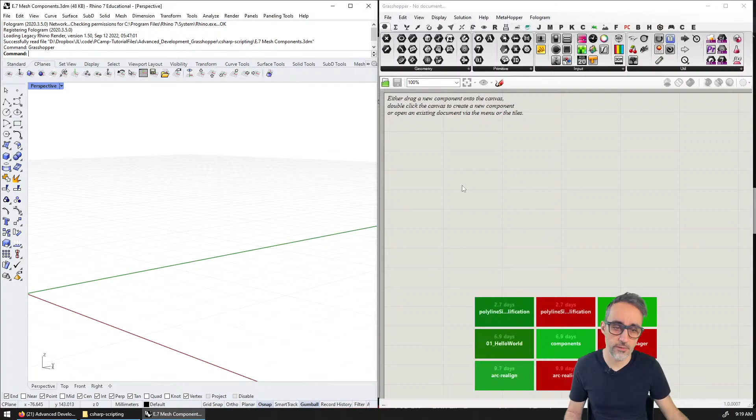Wait, I need to check something out. So we did have document components, mesh components. So why do I not have document components? It feels like it should be there, no? Mesh components. Alright, so mesh components is this one, and we got the geometry and the person class and all that stuff.

Mesh components, dynamics. How is this different from this other file that I have here, which is opening in a different browser? And it's opening here. Because this is the one where I was doing - I see, yeah, what I was dropping, the actual plugin components.

Oh, by the way, I got an email. Remember we published this to Food4Rhino? I got an email from Food4Rhino saying, 'Hey, we just saw that you have no icons in your plugin, can you please take a look at that?' So I guess we need to make some icons for the plugin.

Okay, so I guess then I'm missing some files somewhere. Let me look up this. Where are those files? Alright, so document components.

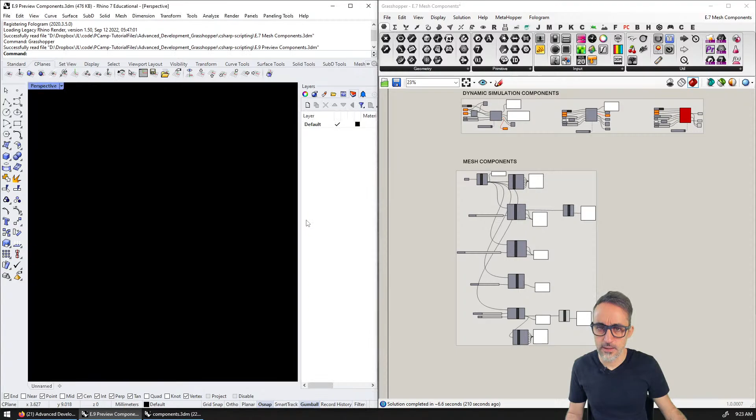Very nice, auto updating simulations. Okay, alright, so I guess I have the files. And then I guess what I need to do is take the latest whatever I had and open them here.

I had mesh components, document components, preview color. Alright, preview - okay, so I guess it's just going to be some work to port all of these to native components, basically. Okay, so that shouldn't be a lot, I think. We never know.

And what I could do is also make a file like this where all the components are displayed. That could be nice too.

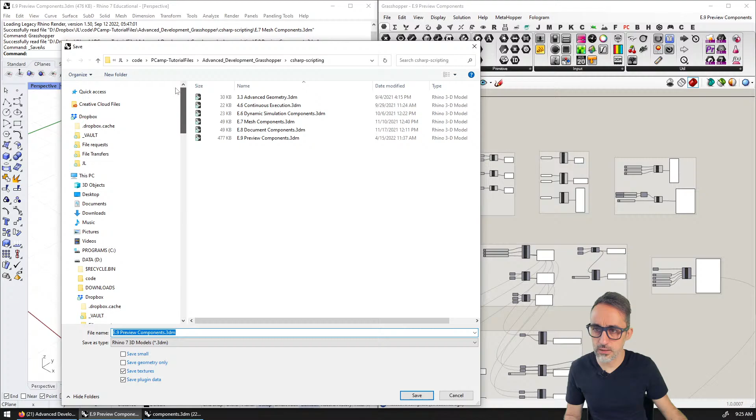Okay, so then what am I going to do? I'm gonna have a file then, I'm going to save a file. And this is going to be - I'm gonna call this parametric camp plugin or something like that. So I'm gonna go to the desktop and make a folder called pcamp plugin, and then I'm gonna call this pcamp components, for example. So that's gonna be it.

And then here on the components, data, utilities, add numbers, console logger, string concatenation.

I need to open the Visual Studio project. Where is it? Where I did the PCamp Grasshopper plugin. I'm going to use 2022 for this one because the typeface is a little nicer.

Okay, so utility components, add numbers - this we probably don't need. Do I need this? Well, I'm just going to do it, and that's going to be nice.

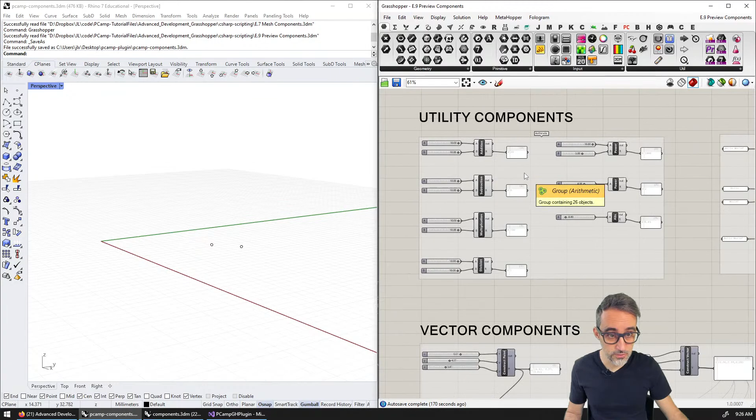I'm going to take this and turn it into, basically clone and copy the components to the side. Why not? I could save this, save document as - go to the desktop, PCamp plugin here, and do PCamp components as a Grasshopper file. What I can do is build them next to one another, no? I guess I could do that.

Before we do that, let me make an icon for this. Icons need to be 24 by 24, so I'm going to make something here. What did I have for icons before?

GitHub, Advanced Development, Grasshopper Plugin, Resources. We had this one, which was arguably a little boring - Parametric Camp. And we had this one. Nope, I don't want that there.

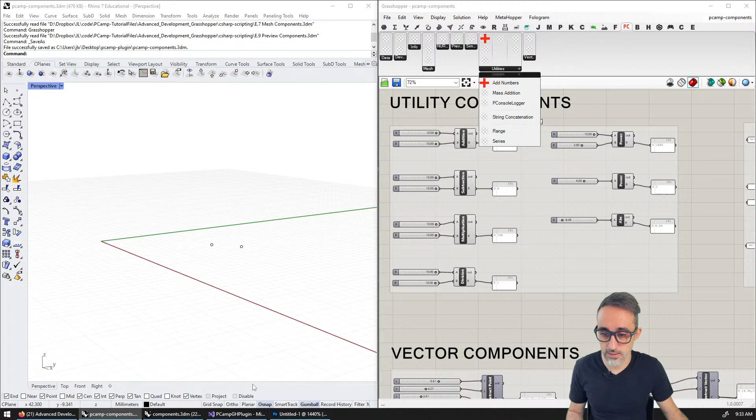Okay, and then we have addition. So let's start with the basics. I'm going to take add numbers - oops, I'm going to take add two numbers, which I already have. And then where did I do icons? I have icons already in utilities, add numbers. Actually, oh, I already have this.

So where is the icon here? I may not have registered it. Okay, well I do have it, yes. So, plus sign - oh no, so I have to add it to resources. What are my resources? I'm systematically confused - where did I have my resources?

Oh wow, this is very green. Okay, dependent and properties, resources - I need to include this. No, I need to include this. Invert parametric camp. All right, I'm gonna say - nope, no, where did you go? I'm gonna save this. And then here I should have now PC invert.

Now what I would like to do is save these files to the repo. I'm gonna save these files to the repo, and I'm just gonna create here a sample files folder.

I'm going to move these files and change this to start in that file. Where are those files I was working with, auto updating? I don't know, so for the PCamp plugin, I'm going to take these files and put them here. That's going to be my new setup, and then I'm going to modify the project so it starts with those files. Where's the project? It's here in the solution. So I'm going to take that solution and change the executable to look for this entire Grasshopper plugin thing, and then where are the sample files?

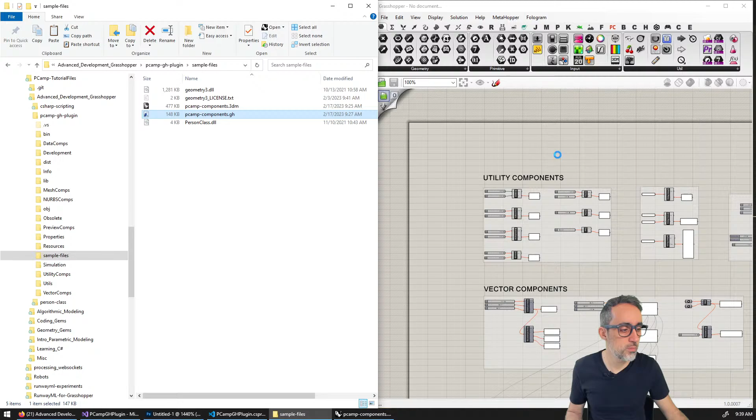Something is not properly linked. Why did I do this? What is this? Am I using Script Parasite in that file? Is that what's going on? Let me just open this straight up. Was I opening it? Maybe that's what was going on. Was I using Script Parasite anywhere? And that's the problem I'm running into.

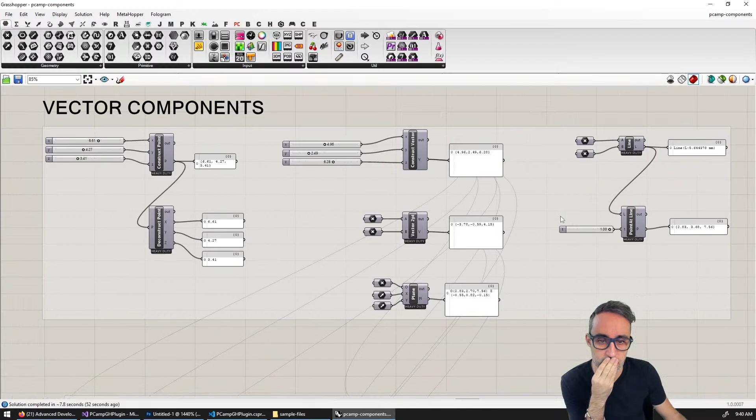Oh boy. Why? Why can things not be easier sometimes? Ugh, okay. Heavy duty, heavy duty. Also this should probably not be heavy duty, right? Data components, document components, preview color, heavy calculations, get heavy objects, add message, preview components. I don't think there's any Script Parasite here. I wonder why that's not working.

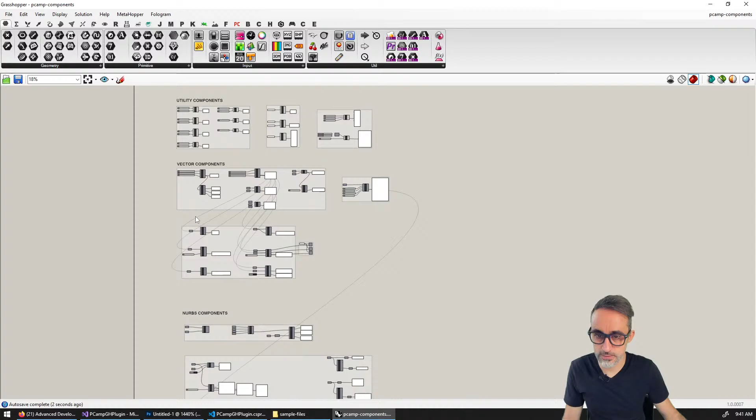All right, so we're going to do like we typically do, shut down everything. I'm going to copy pcamp components here. Okay, and then we're going to do itemized debugging, which means I'll open components one and delete half the stuff. I'm going to see if this was the problem. So I'm going to close this, and close this as well, and then just try to run this from here.

Okay, and components. It's opening on my other screen right now. Why is my computer kind of crazy today? And it opened up fine. Was it because I opened the Rhino file? Let me try that. I'm going to open this without opening the Rhino file and see if it was some kind of clash or problem with unreferenced files in Rhino.

Nope, okay, so that's good. So we cleared half of the thing. So then let's open components 2 up, and this one fails as we open it. So there's something that is messing with the code. Find source. Okay, so we found something.

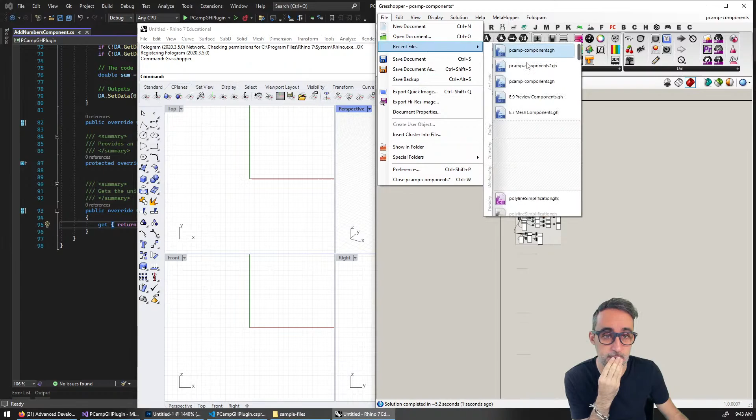So I'm going to open Rhino without any stuff, and open Grasshopper. Yeah, today's going to be kind of a boring stream. Okay, pcamp components 2, and this opens up nicely. So we had the issue in the first one.

So I'm going to introduce now this block here, add it there: dynamic simulation and mesh components. See if this works. Okay, let's save this. I'm going to close everything and try to open from here, and then let's see if it opens up. Nope. So we found the error.

Okay, so something there is not working. So now let's remove another chunk. Detective work here. Let's find what chunk: mesh components. So maybe it's a problem with loading the libraries. Mesh components. I'm going to save this. We're going to try to run from here.

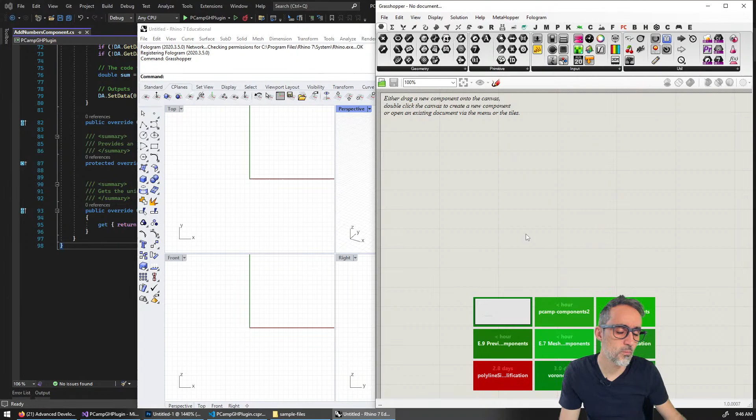Let's see. These ones, is it these ones really? Object reference not set to an instance of an object. Yeah, I know. Because we don't have anything here.

Object, and here index was out of range because we don't have the... Is this the problem, really? I'm going to save this.

I'm going to close, restart over. And then I'm going to open the file and it's going to open properly. Yep.

Okay, let's introduce one of the components and let's see if that was the problem. Okay.

Grasshopper. Let's introduce one of them. I'm going to take... And now it's blocked. Ah, oh boy, this is bad. Come on, come on. And then...

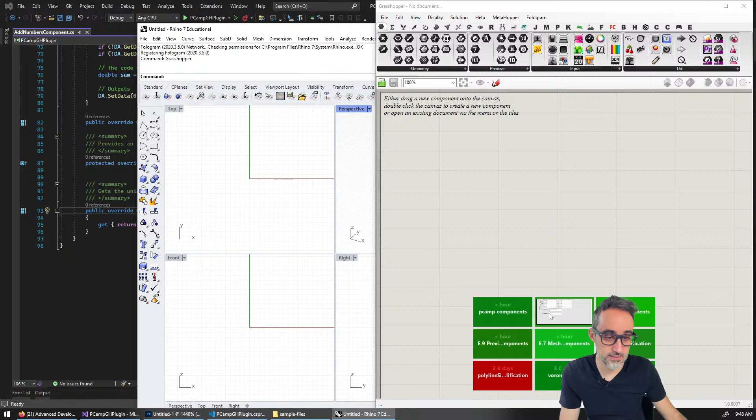All right, so I'm going to open my file. I'm going to open the one with all the files, and I'm going to go to here. I'm going to take dynamic simulation, paste it here, and remove all these folks here.

Okay, I'm going to save this and see if that one is the culprit of all this mess, and if that's the problem that we're hitting.

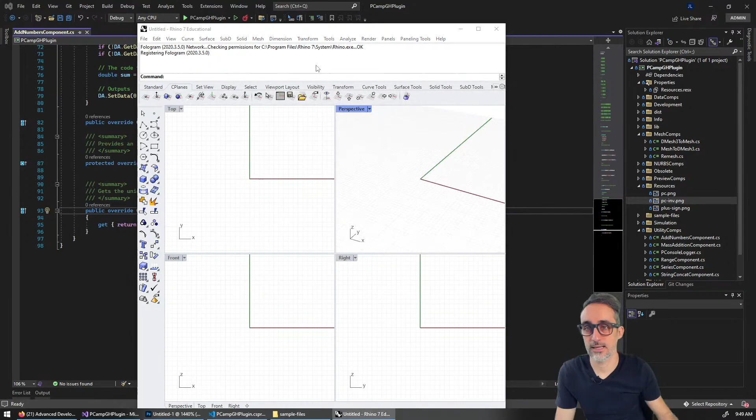Huh, okay. So there is a problem there in that. Okay, so we identified the component that is giving us a hard time here. Okay, so let's take a look at what's going on there.

Grasshopper. This guy. So this guy, it's giving us an exception. Object reference not set to an instance of an object, which is the error that we were getting in Visual Studio.

I wonder if what's happening is that because this component is throwing an error that is handled by Grasshopper, when we open with Visual Studio it picks up this error before Grasshopper does, and then it gives us a fail. So what is it that it's not reference to an instance of an object?

I guess it's the points. Is that correct? Because everything else, if reset is true, so if I do this, that's fine.

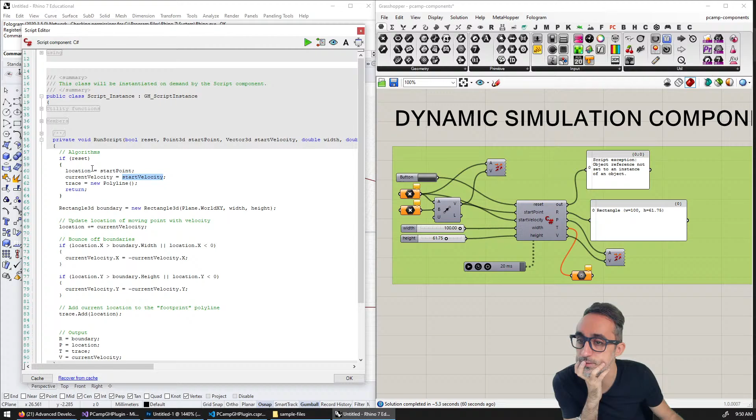Boundary block if location.x, location is the start point, current velocity is start velocity. If this is null, can it be null? Okay.

Checks. If start point equals null, then print no data, and then return, but it can't be null because it's a struct, so it cannot be...

Is... Okay, so let's all right, so let's, maybe this is some sloppy coding. Okay, so still we do have...

Unset polyline is trace. Okay, so this is not working. Not working. Not working. What the hell? Nothing is working here. Okay, so...

Location and velocity and trace. This must be. How are these? They are trace exists. This exists. They are unset points. Location exists. Current velocity exists. All right.

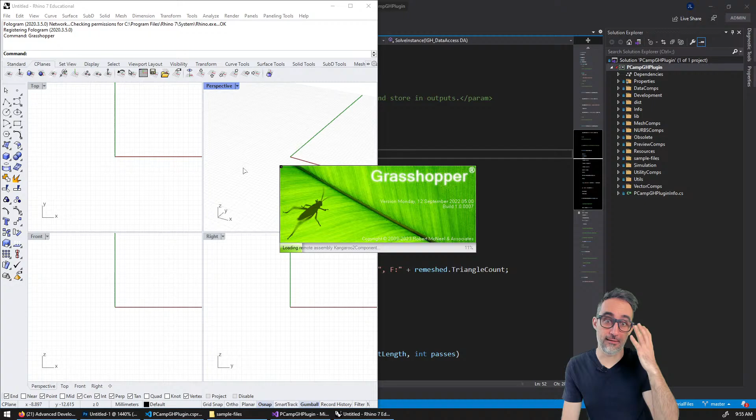The life of debugging. I want to ignore this. Okay.

So let's try to figure out why a new polyline is giving me this. Okay, so I'm going to uncomment this. It's going to give me this error, because trace is not there.

What if, okay, so A, and what if I create a new empty, and then say this is going to be just a new polyline with nothing in it? Do I get an error?

Okay, let me comment this out. Do I still get an error? I do get an error. And A equals, so I'm going to comment this out.

So new polylines, for some reason, they yield... is there not a... Okay, so let's see, let's look at the constructor. Can I create a new polyline with no arguments?

Initialize a new empty polyline. Initial capacity, collection, so I can create an empty polyline. Why can I not?

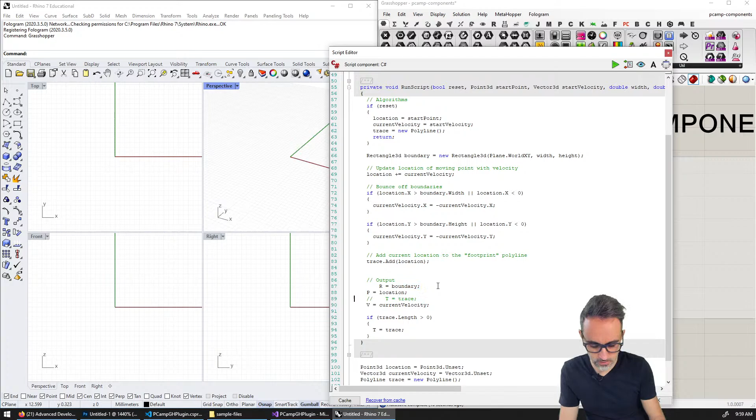Yep, I guess that's the way to fix it, but this is so not nice. And then, oops. We can do this, we can remove this. I guess that's the solution, apparently, which is kind of...

Okay, so then if I bring everything back, so component stream. Okay, so let's bring everything back. I'm throwing myself here, I'm gonna get more errors, I know.

Okay, so I'm gonna say here, I'm going to cancel this out, and I'm going to say, well, if trace.length is greater than 0, then t equals trace. Okay, so no errors here. Now here, same thing.

If trace.length is greater than 0, then output it. I guess that was not the only error here.

And then I guess we can do this, new polyline. And okay, so I have other errors here. If I clean this, there's no error.

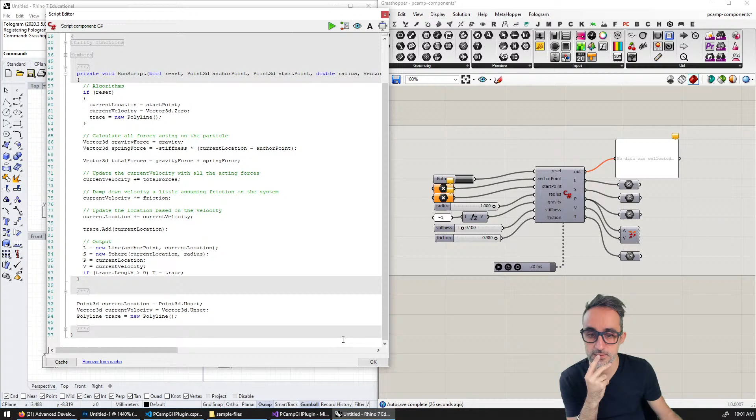Oh, and it says like that. Okay, so I'm going to reload, recompute so that I get the error. Ah, I don't get the error now. Maybe I didn't do this. What about here?

Index was out of range, non-negative parameter. That is sloppy code. So where do I have that?

Okay, so I'm going to comment this out, run this object, of course, new polyline with nodes. If nodes.length is greater than, no, count is greater than 0, then create the new polyline. There you go. And then uncomment this, and this is where I get the error.

So I can do here like a check, for example, if nodes.count is equal to 0, then stop doing anything. I don't want to calculate anything. And then I'm going to do this. Another component works. Okay, so now I'm going to save this.

Okay, and I'm going to get more errors here. Is that what's going to happen? Well, but at least let me save this and try to open it from Visual Studio. Can we cross our fingers? Yeah.

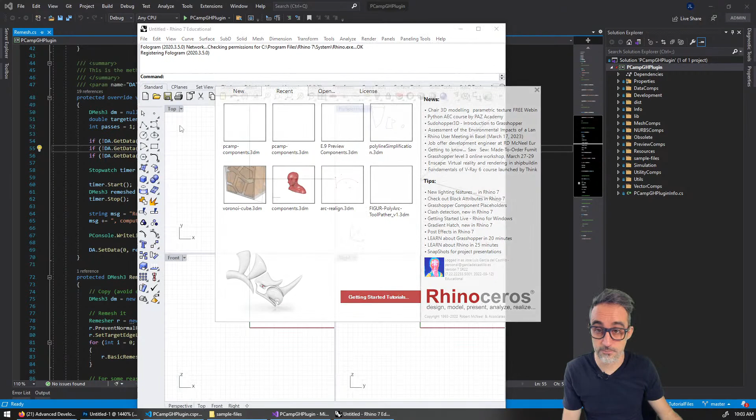All right, so okay. Is this a rabbit hole that I should not worry about? Because if I fix this, it's going to be useless, and I'm going to lose all morning, and I'm not going to finish the project, which is not what I wanted to do. So can I just somehow work around this?

Sample files, geometry. Is this blocked? It's probably not blocked. Okay, so all of this. What is this? Reference. Okay.

So if mesh equals null, return. No errors here. Where is the, okay.

If d mesh 3 equals null, return. And I'm going to copy this, clean, clean. If d mesh in equals null, return.

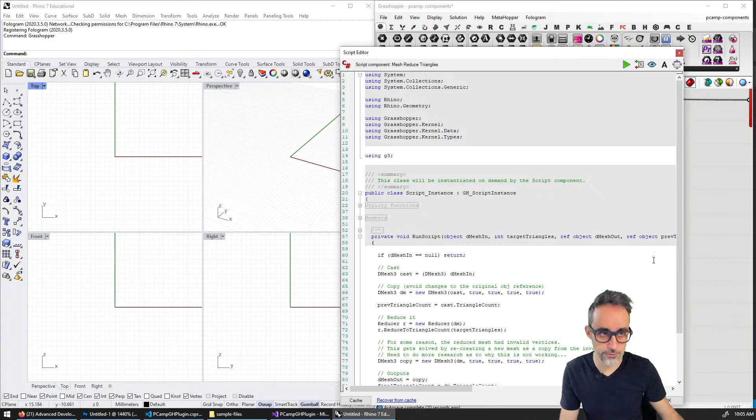All right, what about this one? Here. Okay. If d mesh in.

Why do I have this OCD? Does anyone know good therapy to get over OCD and having everything right in order, structured? Can anyone help me out with that?

Okay, all right, beautiful. Do these have errors? This one. Okay, what is this? Surface. Okay, so if S equals null,

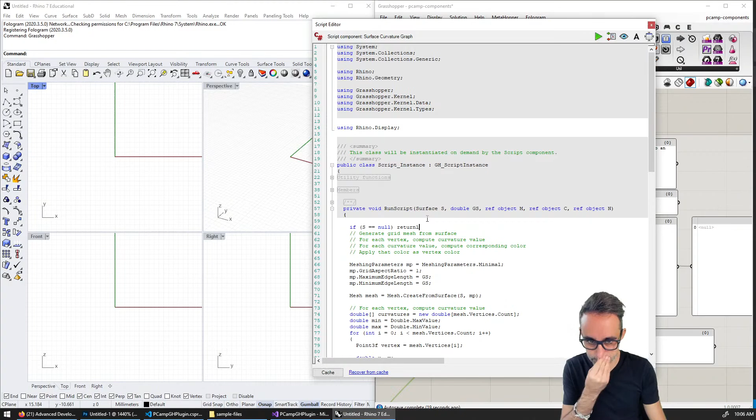Are you folks familiar with null as an object? Did you ever read about how it was invented? It was actually an invention. It was designed by this computer scientist called C.A.R. Hoare, I don't want to mispronounce that. He was the one who invented the null pointer, the null object. And there's a very interesting story, he has a talk about how he calls this his $1 billion mistake, because null as an object has created so many problems and so many things breaking in the world that he now believes it was not a good design choice. This was back in the times where computer programming languages were still evolving and very heavily designed, which was a super interesting period in my opinion. But if you want to nerd out, you should read more. It's a very interesting story.

So I clean up all the errors in the file. So hopefully we can open this from Visual Studio now.

Why are you doing this to me today? What's happening? What do you need? Cancel. Well, it's only one file. Oh boy, it's just one file. No? What have I done? I turn something on. Oh, can I enable this? What have I done? Yeah, come on, leave me alone.

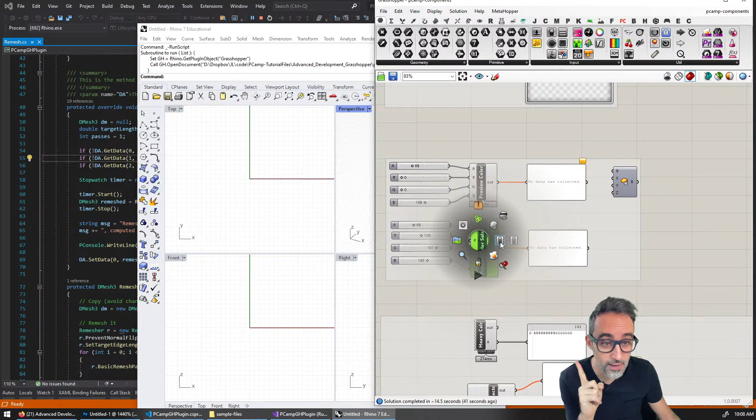So there is one, we still have somewhere where it's not working. Somewhere, just one file. One red component, where is this? Index out of bounds, is that what's giving me an error? So all of these, no, but that was the one that actually was, we had that. Where are you? Which one are you? No data. Oh, this one?

I wonder what have we missed out here. This was the one that when I pressed the button, it got well. So what if I, no, okay. Nope, that was not the one.

Any guesses, folks? What is going on here? What if I cancel? Okay, so yes, and an error, blah, blah, blah. Just leave me alone. Okay.

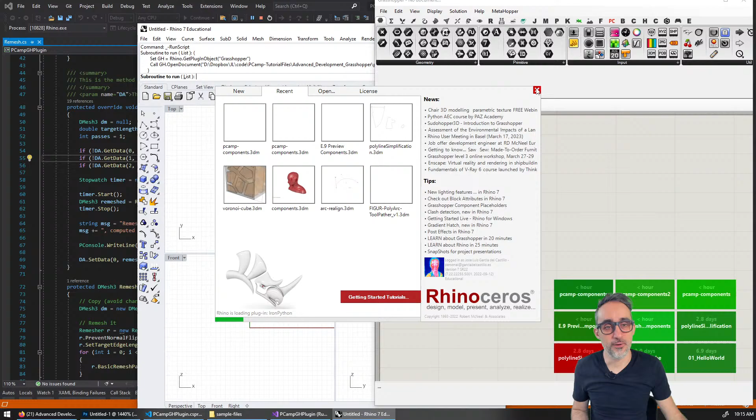I hate you, I hate you. Oh boy. Why are you doing this to me? Where is the error? Who is messing with me?

See, this is the problem. I'm so stubborn, so I kind of want to find it and destroy it.

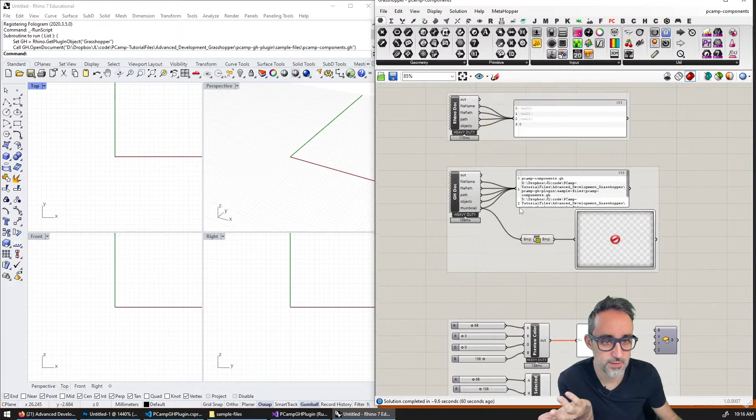Curvature graph, no error, no error, no error here. No errors in any of these. No errors here, here, or here that I know of, correct? Error, mesh, mesh, mesh, out, out, out, no. And this one doesn't have any errors. Not this one, not this one.

So someone tell me what's going on here. And this one was not giving me any trouble before. A reference mesh could not be found in the Rhino document.

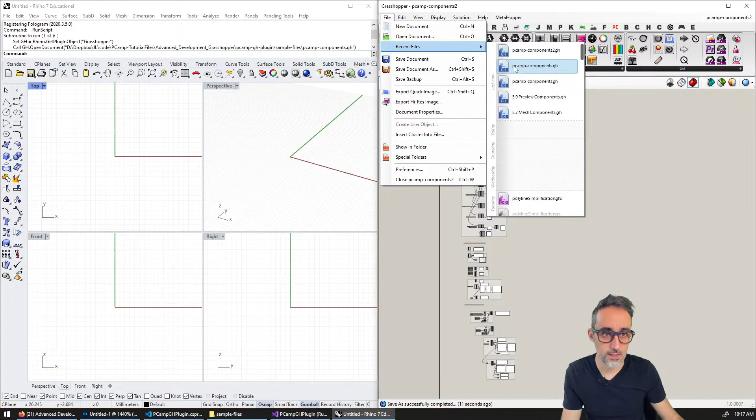Okay, so I'm going to do the same thing. I'm going to save this as this file here. I'm going to remove. Yes, and then I'm going to go back and open the original one. Not this one, shut up. I'm going to open the original one. Okay, yeah, I've heard you before. And I'm going to start removing everything again.

I'm going to save this. I'm going to reopen and see if I get the error. I'm going to try to narrow down what the problem is.

So these ones are good. Okay, so then that's promising. So then when I open pcamp-components2, I'm going to get an error. Yes, okay, all right, but I can continue executing. So from pcamp-components2, let me take these folks here and paste them here. Okay, and then we're going to rerun. Let's see if it's the meshes that were causing us trouble.

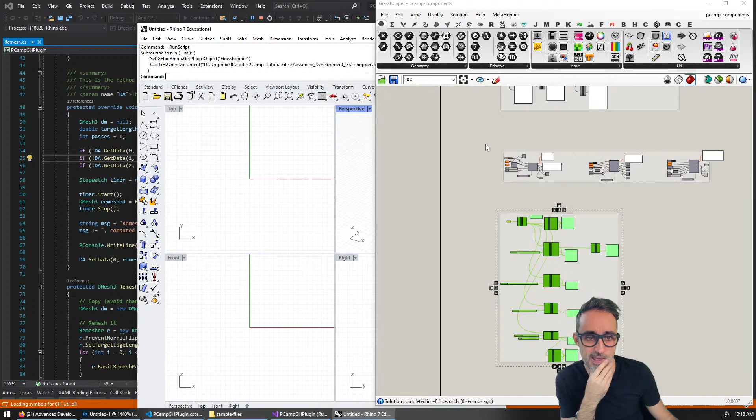Okay, so this works. So now I'm going to go back. We're getting closer, folks, getting closer. Here. And document components, let's see if these are the problematic ones. Document components, yes, let's save this. Here, out, no.

Okay, heavy calculation, out, no. Nope, nope, nope. Okay, so let's shut this down. Save it.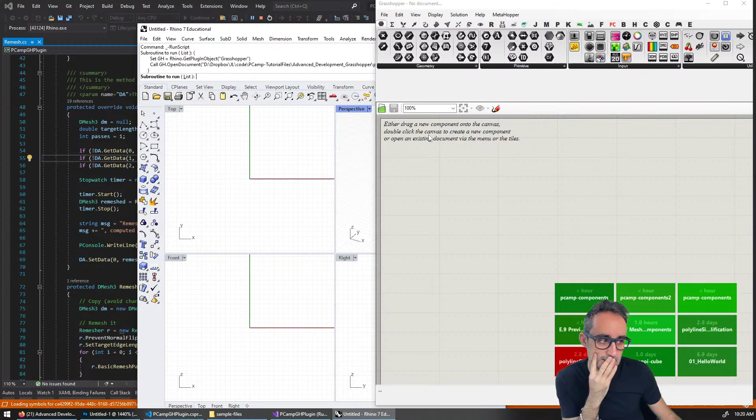Come on. Come on, you got this. You got this, come on. You got this. Ah, all right.

I hate myself right now so much.

Okay, document components, and then I guess preview components. What's the problem with these ones? Out, curvature, nan, null, whatever. Face planarity. Okay, so preview components, let's take a couple in and drop them in. I'm going to save this, close everything, start over.

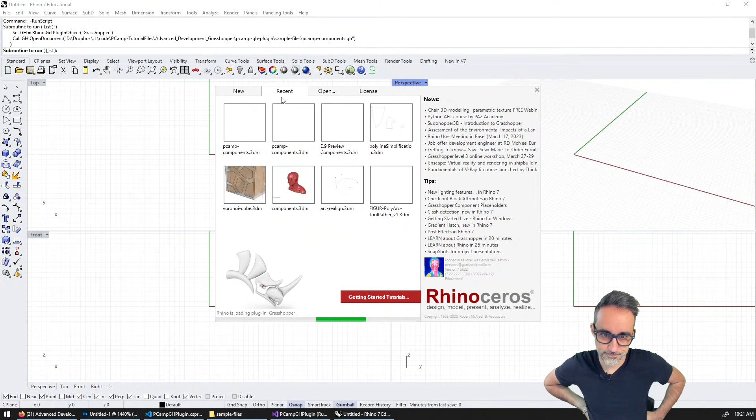Okay, so we found something. It was one of those two. Okay, so let's remove this one. Save. Is it that one?

I wonder if there's any way we could have used the GUID of the C# script component from Visual Studio, read that, and then use that to target. Oh, okay.

So it looks like it was the other one, the second one in preview components. Okay, well let's take a look at that. So in preview components here, all right, that was...

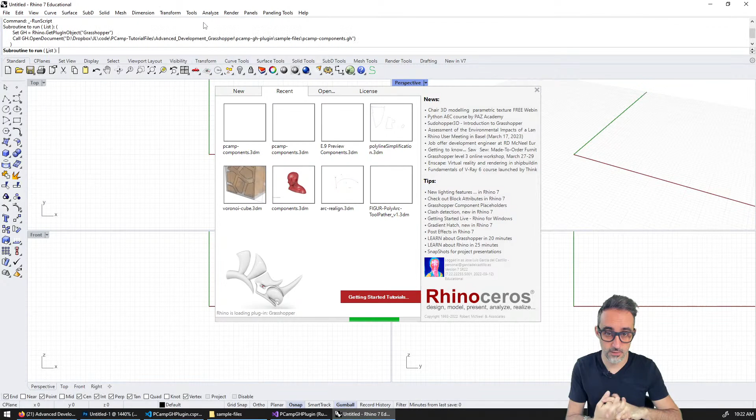Okay, and just to make sure, I'm going to restart with this new one, and it should now give me an error, correct? It should give me an error.

Hi GP Parametric, you found us in a very, very dark rabbit hole right now. I have a very stupid bug that I'm trying to track down and I cannot figure out.

Okay, so it's here. Is this folk here? Bounding, clipping box. So I'm assuming that if I cancel everything here and okay, yes, we continue this. Let me save.

If I don't do this, so I'm going to save this. Actually, you know what? I think probably the good thing to do would be here to say, you know what? If curve, which is a...

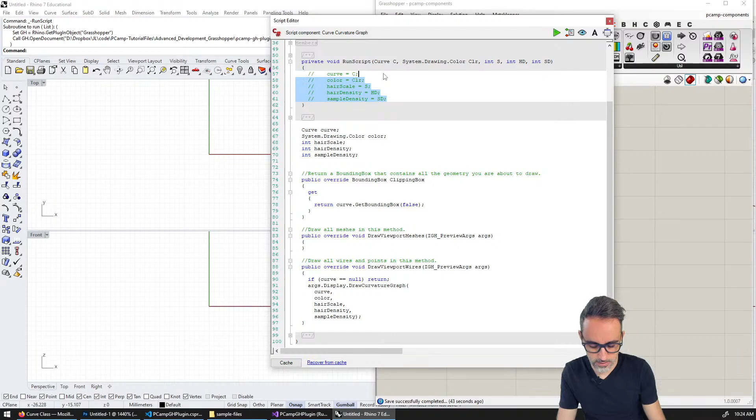Okay, so let's take a look at Rhino Common. Okay, Rhino Common geometry, curve is a class. Is that correct? The curve is a class, which means it can be null. So I'm going to return this and I'm just going to save this.

Yeah, whatever, because everything else, I think color, System.Drawing.Color is a struct actually. Can I? System.Drawing.Color is a struct which cannot be null, so it always has some kind of value, undefined, whatever that is. And then hair scale, those are primitives which can also not be null. So this is the only nullable item which is coming here, which probably means that this is being called with a null item and is creating an error.

That's probably what's happening here. So maybe if we add this safeguard here, we might... Okay, all right folks, I think that's it. This happens, this is a lesson. It's called don't write sloppy code. Always check for nulls and make sure that you have safeguards in place for all this stuff not to happen.

Come on, please. Why are you doing this to me? Why? Oh, can I cry here? Is this a safe space?

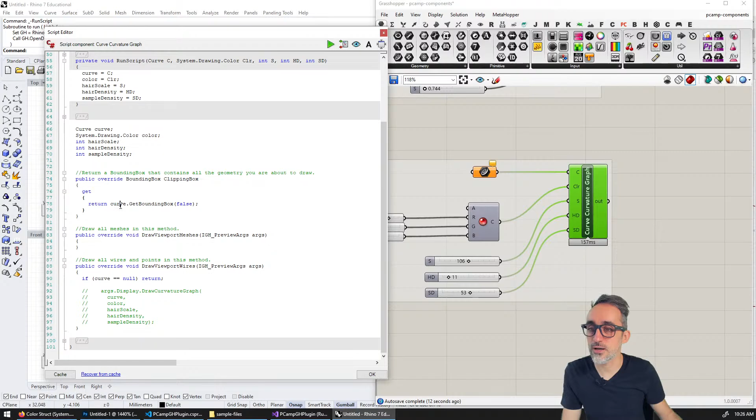Okay, so what if I save this like this? What if I save it without actually rendering the thing? Oh yeah, because I'm also doing bounding box, clipping box, return.

Oh, wait, the problem is I'm also using curve here. And if curve equals null, can I return a new bounding box? Is bounding box a struct? Probably.

Bounding box is a structure, yes. Can I create an empty bounding box, or is there any static? Empty? Yes, it's a static. So can I return bounding box dot empty? Maybe that is the problem.

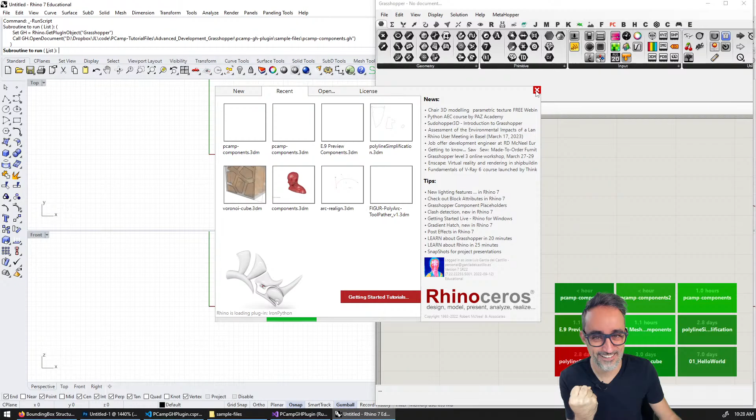I feel we're so close. So close. Come on. Come on. Give me this one. Give me this one. Come on. Come on. Yes. Yes. Can we clap on the chat or something, please? Oh boy, that was awful.

Yeah, so you see what happened here? What's happening is when the component doesn't get any input, curve is null, doesn't exist. And when it doesn't exist, then this line of code creates problems because you cannot get the bounding box of a null element, so error. And then also here, you cannot draw any curvature if this is null. And the problem is that because these two methods are overrides that are handled independently by Grasshopper, they were not giving me errors in the output here. So I couldn't see that basically, but they were yielding errors internally.

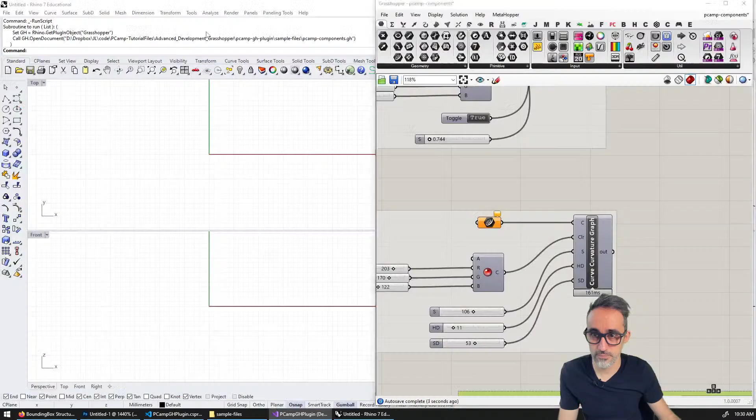Oh, that was painful. Okay, so now I'm going to bring back everything that needs to come back here. Okay, continue. I'm going to bring back document preview components. So that's going to be these folks here. I guess, yeah, whatever. And because I have OCD, I just noticed that I missed bringing in these two headers here. So I'm going to close this. Where did I have?

Okay. Oh my God. So this file is the one that was not clean. Okay. Oh boy. Okay. Utility components. All right. Dynamic simulations. No, what have I done? No, wait. Do I still have errors here? That can't be true. Oh boy. Ah, no.

Okay, I want to bring this back here to my other file. What? Okay, did I not save this properly? I did save it properly. Okay, so maybe it's just stuck with the old error. Okay. So, all right. This is the moment of truth.

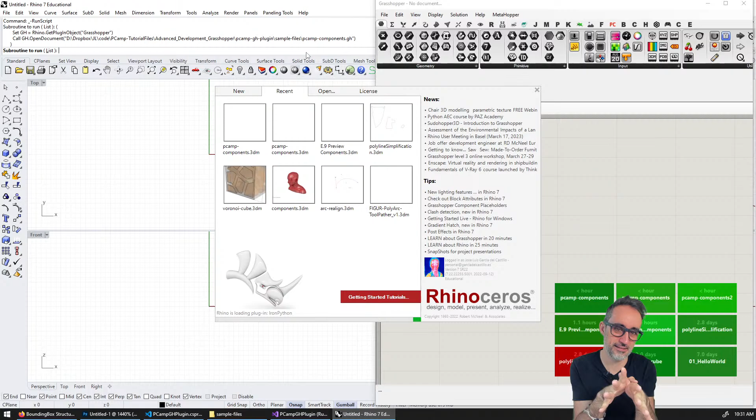Is the file ready to actually start working on it? Please, please, please. Please, please, please, please, please. Please, please, please. Come on, come on. You got this. I'm

Breathing. Cody, I wish that was true. But very obviously, Jose is a very sloppy programmer, writes terrible code. Oh, I guess I have the same problem here. Ah, yeah, I guess that's also true.

I'm probably getting a render mesh equals null, return bounding box.empty. I guess that's a similar issue, and similarly here, we still have the same issue as well. If render mesh, just return, do nothing about this. You don't want to render anything here. So that should be, yeah, whatever. Mesh face planarity. Yeah, whatever, blah, blah, blah.

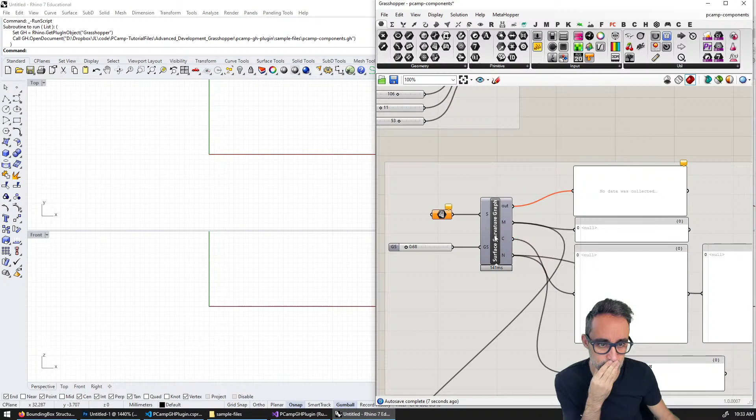And vector preview. Okay, I'm gonna save this. And I'm gonna try again. Okay, come on, come on, come on, come on, come on. Come on, please. Oh. Folks, I'm very, very close and ready to give up.

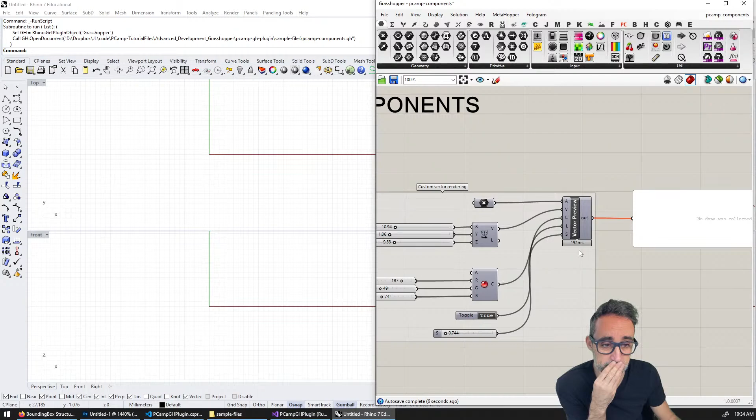What is going on? Oh, I hate you. Is it here? Point colors. Arrow bounding box. Is it here? Did I forget to write? Is it here? Did I? Okay, I don't know what's going on.

Mesh planarity. If mesh is null, just don't do anything. Planarity. Maybe here we got the same issue. If render mesh is null, then just return an empty bounding box. And if this is true, if this is null, then just don't do anything. Don't render anything.

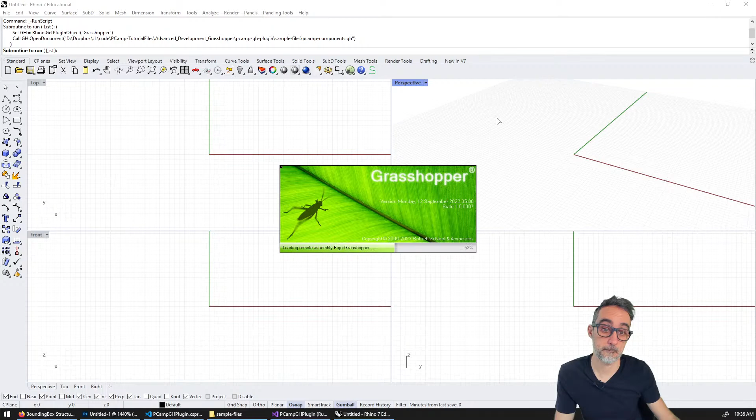Wait, I didn't get an error when I saved that. Whoa, whoa, whoa, whoa. Was that a good indication of something? Was that a promising indication of something? Please, please, please. Come on, come on. You got this.

Did it work? Did it work? Oh boy. I'm really gonna cry right now. Oh boy, that was painful. Okay, all right. I don't know if I'm gonna cry out of happiness, sadness, or despair. Oh boy.

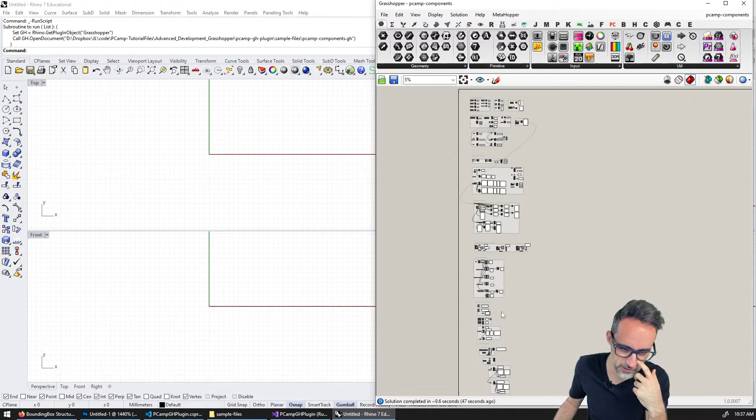Folks, may this serve as a lesson for all of you to always avoid writing sloppy code like this, currently being a university professor who teaches these things to other people and then does a terrible job writing this properly himself. Okay, may this be a lesson for all of us to make sure that we always check our null types and do safeguards in our code, and make sure we handle corner cases.

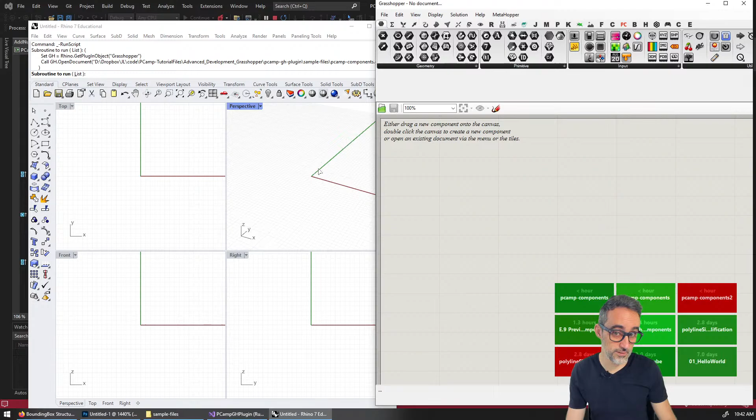Yes, so now we can get back to work. The work was to now develop all the components that we have in C#, develop them in the Visual Studio thing, which is working well, and develop them... am I running into, oh boy, am I gonna OCD myself again? Yeah. Okay, it's okay, it's okay, not gonna. So basically recreate all of these in C#. Okay, let's go ahead and start doing that.

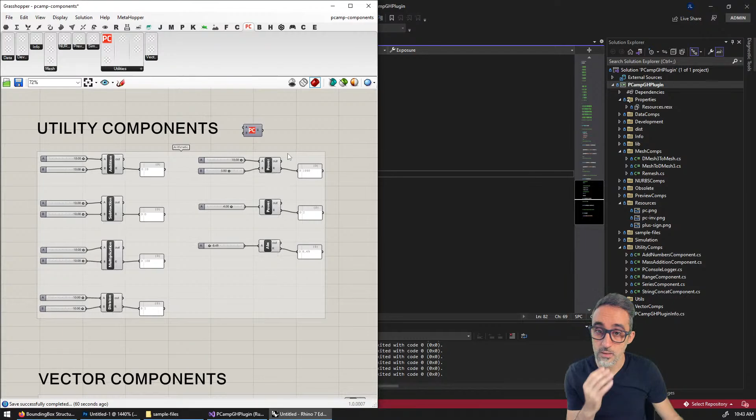So here I added PC, all right, which means now I should be able to copy these. And how am I going to copy them? Should I just insert them? What would be a good way? Should I just plug the component in here and then do this, and then do this? Or should I just make a brand new column here? Or copy them here together, like make something like...

I think I'm just going to go the easy route and just replace stuff here, you know? I think that's probably what I'm going to do. Okay, so let's get started.

So I'm going to change this number, I'm going to rename this addition component. Okay, addition. And I closed the file now, so I don't know what I have. You know what? I'm actually going to open... no, I cannot open another Rhino because that's going to be... okay, what am I, how am I going to do this?

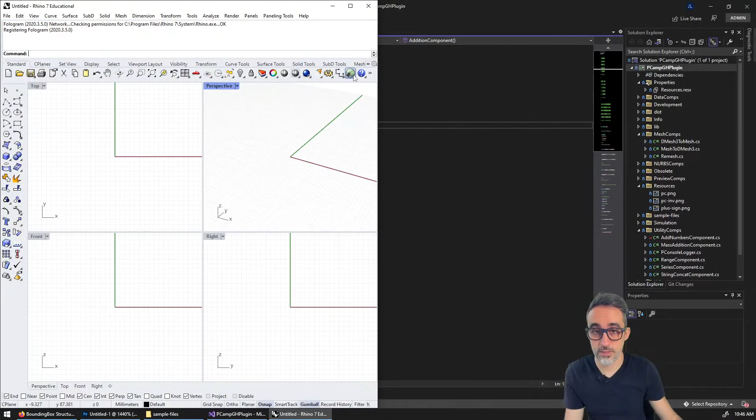So I guess I could open a Rhino 6. Do I have Rhino 6 here? And if I open Rhino 6, is that going to conflict? I don't have Rhino 6 here. Nope, no. So I don't want to have a Rhino open. Well, maybe it works, I don't think it's gonna work. I don't want to have a Rhino open because if I open Rhino, then it's not gonna catch up, it's not going to pick up my changes. Sorry, let me say this again: if I have a Rhino open like this, then the library, the DLL, is going to be loaded always.

If I reload from Visual Studio, it may not pick up the changes. Okay, let me just try. So subtraction - right now, where am I? Mesh components, resources, utility components, add numbers components.

So I'm going to say this is addition. Okay, now I'm going to add a new item, Grasshopper component, subtraction component. I'm going to copy all of these here, overwrite all of this, and call this subtraction component.

Subtraction. I'm going to skip descriptions because it's going to take me forever. I'm going to call this subtraction. Subtraction component - now this is the chunk of code I want to copy and paste for the rest. Now we want to do multiplication.

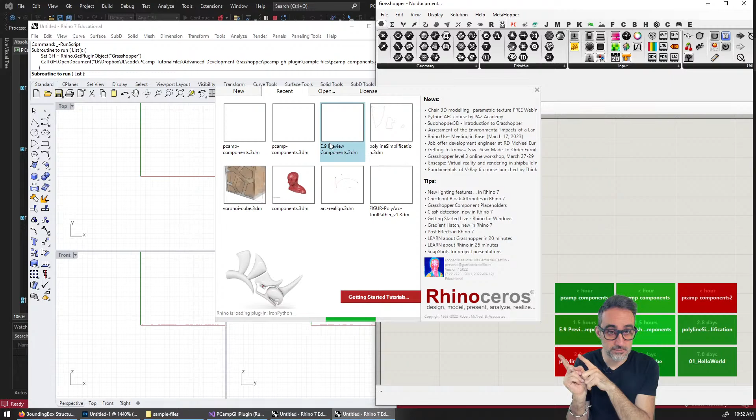Okay, all right, I think this is a bunch of stuff already. So let's now run this code, see if we get a Grasshopper file with the new plugin loaded and it's not conflicting with the other one. Okay, and no errors, that's good. Okay, and we got a new one, this is great.

All right, string concatenation, series. Vector components, addition - did I do mass addition? Okay, so good, we're going to do this. So what I'm going to do now is replace them: addition, subtraction, okay this and this, multiplication, here, here, and here. And then division is going to be this, this, and this.

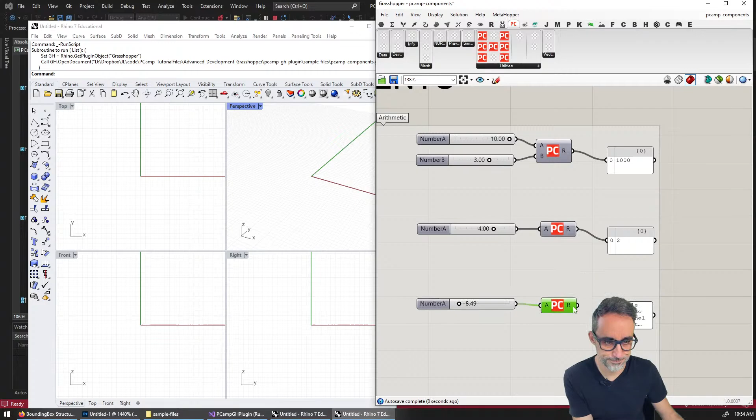Power of one thing to the other, power, square root here, square root, and then the absolute value. All right, so arithmetic is good. We got this, we save this file, then we go next. String length, string concatenation, and string manipulation - that should probably be the next one. And this mass addition and console logger, I don't know where we had those.

Maybe we can have mass addition here, for example, and we just input a list of stuff here - 1, 5, 43, all of these, you know. And then we do this multi-line data, we input this here, and then we plug this in here, result and partial results, you know. And then we just all add to the group. Beautiful.

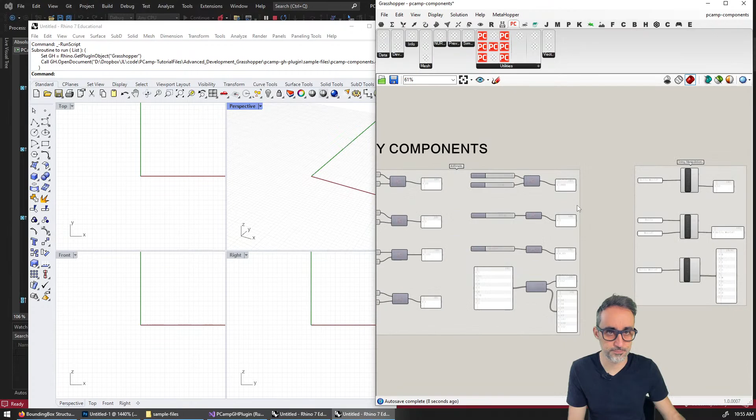And so for mass addition, I probably want to add the icon here. Exposure is going to be primary, that's fine. Yes, okay, beautiful. So what are we doing next?

The next thing we're doing is string components. For strings, we already have string concatenation, so that's great. So let's do string length — new item, string length component.

Ali, do you have any words of encouragement or advice for someone who's approaching parametric design while being fearful of its complexity and cognitive mathematical requirements?

Yeah, so Khalid, good news is, it is true — it's a fear, and it's a lot of stories you may have heard from people. Oh, it's like very complicated math, blah blah blah. It's not true, it's all about logic and it's all about string concatenation. It's all about logic — wait, sorry, string length. What am I doing here? Give me one second, Khalid, I'm kind of in the middle of something.

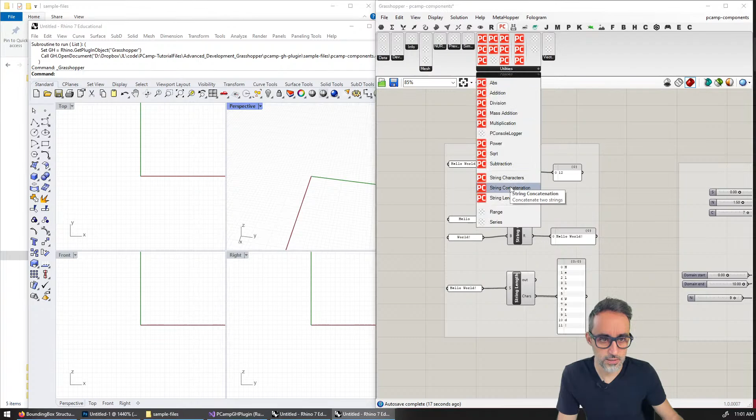String length, string concatenation, and string characters. Okay, length, you got 12. A string, okay, got it, good. And concatenation, all right, beautiful. So it looks like this is working. What else do we have?

Series and range, okay, let's do this. I'm gonna close here. Numerical, and then series — this should be probably range and series. Yes, oh, I already have it, nice, so I just need to reformat it. So range component, okay, I just need to add here the icon. Range component, tertiary, yes, and I want an icon there.

And a series component, and an icon there. Okay. And I will probably want to redo — so okay, I'll do this next round. Vector components.

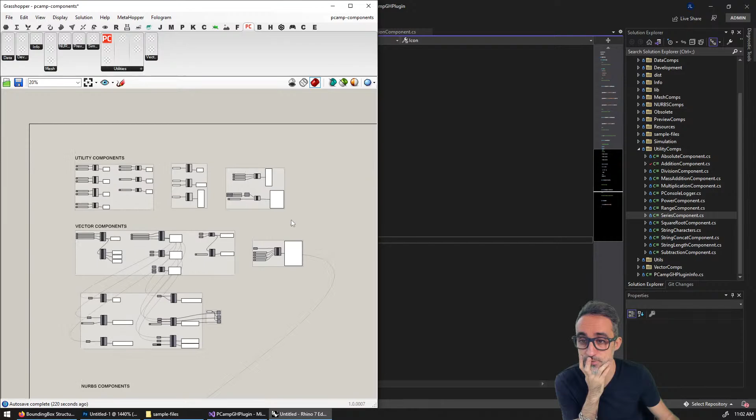But you know what, I'm actually going to save this right now. I'm going to run it, I'm going to change, and then I'm going to commit this so that people can see incrementally how I'm building on top of the file. I'm going to go here, open a terminal. All right, I'll get there in a second. And now the console logger, I think I should move that somewhere else. Anyway.

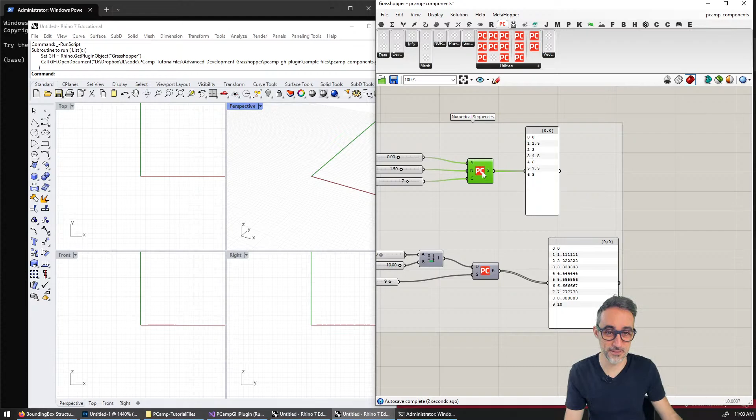Okay, so that's going to be there, range and series. Should I turn icons on? Should I turn text on? Because the icons are definitely not contributing a lot here. That would kind of be a little against all my preachings, huh? So I'm going to add this to the group, and we got this.

The console logger, maybe I need to make it into its own category. Maybe, we'll see about that. We'll see what can we move there.

Okay, and then I'm going to save this, and I'm done. And I'm going to say, how are we doing here? Oh, there's a lot of changes. Git, I'm going to add all of them, and I'm going to commit utility components native. And I'm going to push right now. Beautiful.

All right, the logger. I'm just gonna... what am I going to do with the logger? I'm going to make it quaternary first of all. Quaternary, and I'm going to give it an icon. Okay, and so that's good.

Beautiful, what else do we got? We got vector components, alrighty. Vector components, what do we got? Construct point, construct vector, vector 2 points, and plane. And then line and point at line. Okay, point grid. So I'm going to copy and paste all of this stuff.

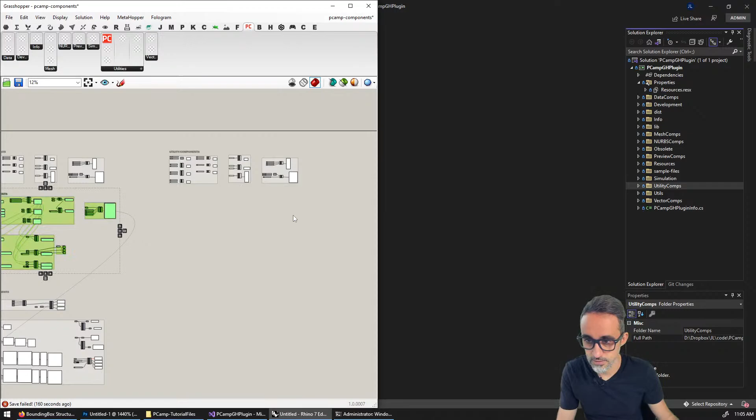Oh no, but this is not the one that I want to work on, that I will open. This file is obsolete actually. Let me save this with a different name, reference, so that I don't overwrite by accident the file that I'm actually working on.

So vector components, okay, construct point, deconstruct point. And what do I have already? I have construct vector, point grid. Okay, vector components. So, okay, so let's start simple.

Construct point component. All right, and for that, I'm going to copy this. I need to replace the icon. Where was I? Resources, mesh, development, utilities. In utilities, I had absolute component and I had primary. So I'm going to...

I'm going to first copy the... yes, I'm going to copy all the vector, which is going to be very, very similar. Then I'm going to change construct point, and then I don't want this, and then this is going to be result, and it's going to be result, and I don't want any. Okay, so this is point that we're working in. So this is gonna have to be add point parameter, the result, okay? And then this will be changed to point 3D P, and then this will be point 3D P with these three components and the same thing.

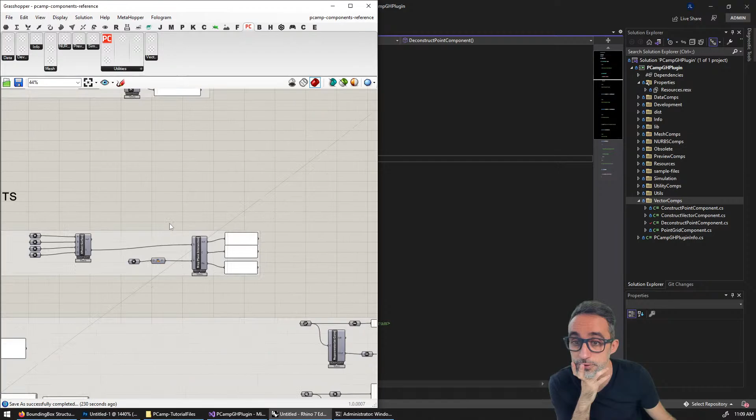Oh, I feel very, very burned out right now. And look at everything, it's just that it's going to be... well, we still have an hour, more or less. So I'm going to keep going, but I'm already hating this. So it's not a good sign.

So I'm just going to add point parameter, and it's just that it takes a lot of time, this is like a menial thing, you know? And then adding the outputs, and then solving the instance. You know, and solving the instance. Now I have to copy all of this and then get the data. It's just kind of a lot. I'm never going to finish this.

And then here the construct point. And you see, there's a lot of small stuff to be done here.

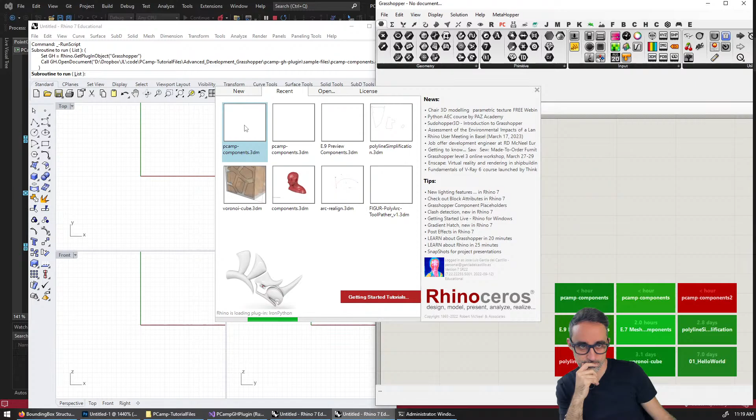Okay, and we are going to copy all of this here, and we're going to start replacing. So vector, oh, we haven't replaced that. Okay, construct vector, where are we? Construct vector, we have not correctly, oh, no, no, no, no, no, no.

Here, this construct vector, I'm going to do primary, yes, and I know continue editing, it's fine, I know that.

And where am I? Yes, so I'm going to construct a point here, deconstruct the point, then I'm going to construct the vector. I'm going to vector 2 points, and I messed up. What is that? Vector 2 points, there you go. Vector 2 points, continue editing. What are we? Here. Then plane is right here, then line right here, and then point at line right here.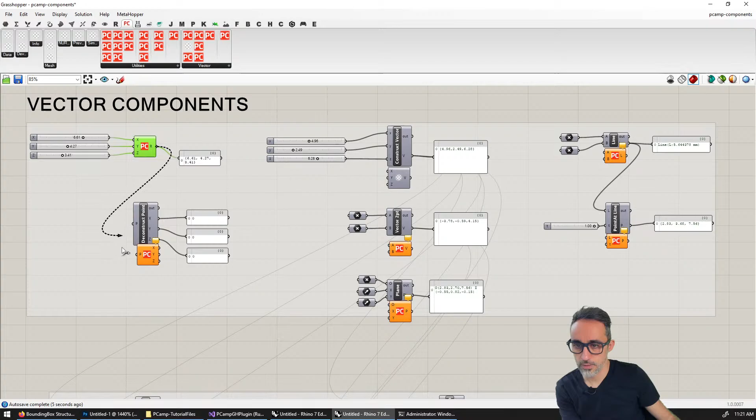Okay. So it works. Deconstruct point is going to be this one, and I'm going to, very good, construct vector. Okay, great. And everything we had in here, I'm going to copy and move it right there. And everything we had in here, I'm just going to move it over there as well.

Yes, I don't know, I had nothing on this plane. Then we do have a line over here, point at line up.

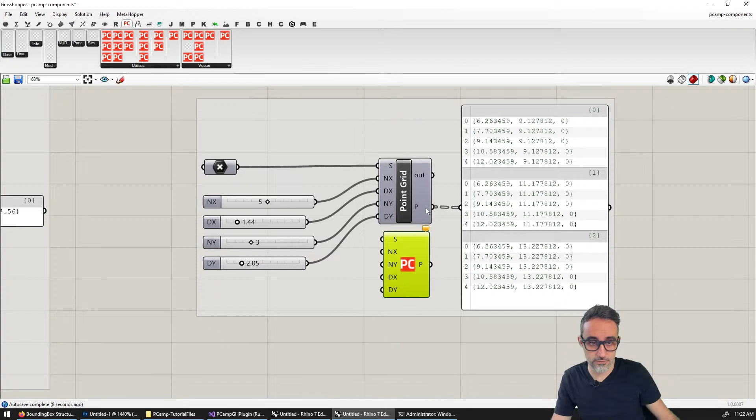Yes, so we actually want to do that this way. And then we want this, we want this. So that's good. And then for point grid, we already have this over here, this over here.

Okay, beautiful. All of these were not visible.

Okay, all right, great. And then vector length. Oh boy, vector addition, vector tween, vector cross product. Okay, well, this is what we got ourselves into. So let's do this. I'm going to save here, close the document, close the stuff, and then we're going to do vector length.

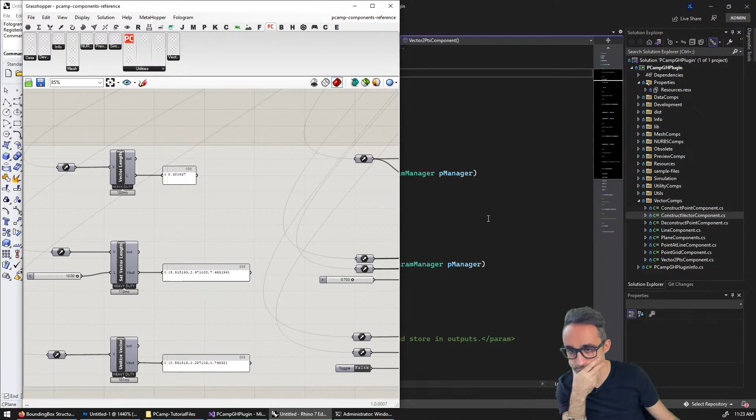Hey Andres, hola, cómo andas? We got a fellow friend from Colombia in the chat today, Gustavo Avellaneda Malagón.

Okay, so vector length, vector 2 points, vector length. Okay, so we're going to create a new item. It's going to be vector length component.

Vector length. And this is going to be this vector length. And then we're going to pick up a vector, pmanager.add vector, and that's going to be v, no description. I'm really lazy here today. Okay, so one vector. And this is going to be, I'm going to add a number, and this is going to be length, and that's it.

Construct, deconstruct vector, deconstruct point. I'm going to copy from here. To solve the instance, I'm actually going to copy all of this. Vector length, and I also already do here. I'm going to do tertiary, because I want another subdivision. Vector 3D, it's going to be vector 3D. I'm going to rename this to V, and then the data, I'm going to take the length, one output. Okay, what else? What else do we got?

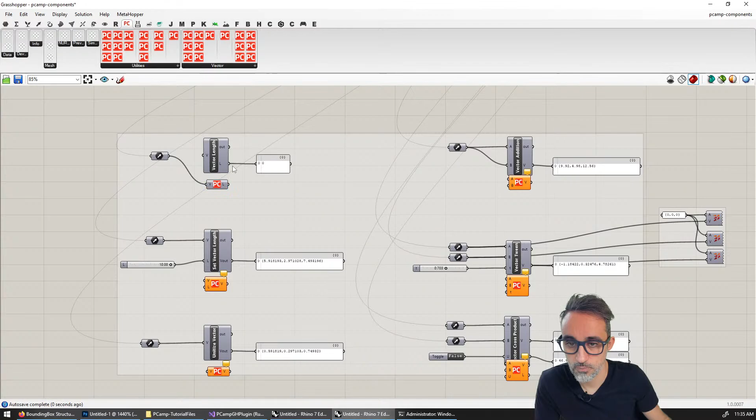Set vector length here, unitize vector here, vector addition - this one, cross product - this one, vector tweening - this one. And let's just do this: pong here and here, here and here, and here and here, and here. I'm surprised this didn't complain.

Oh yeah, it is complaining, but okay, so here, then here, all of these. Okay, so that's there, there.

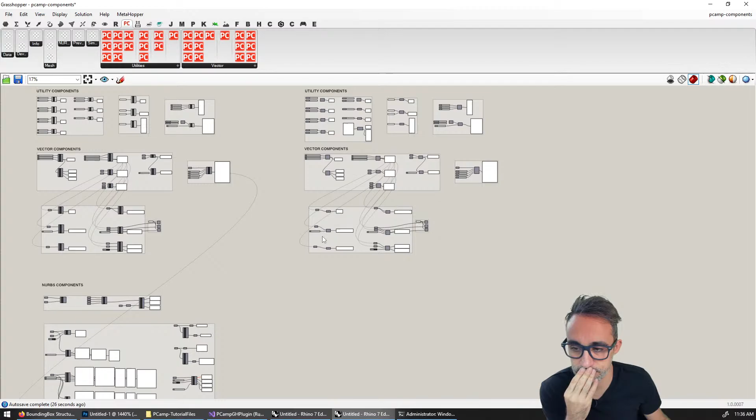And I should include all of these in the group just to make sure things are in the proper order. Okay. Oh, okay. And I'm going to save this.

And I think, folks, this is where I'm going to leave this, because I cannot. I'm super burnt out and I don't want to continue doing this. It's going to take me forever and it's not interesting. And I think other people from the community might be interested in doing this as a way of practicing. So I'm calling it, I'm dropping the microphone. Or whatever, no that's not the right one. Dropping the microphone. Anyway, I don't want to deal with this anymore.

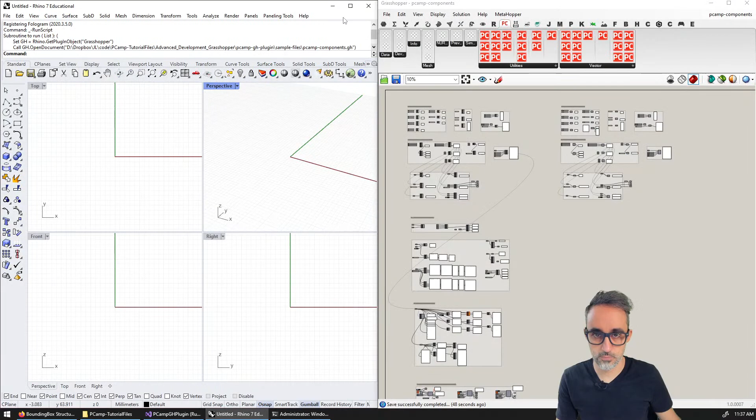Can you make sure, about custom attributes, and see how to create rectangular buttons, radio buttons, etc. in a component? Ooh, that's a very good one. Custom attributes, I could probably do something about that.

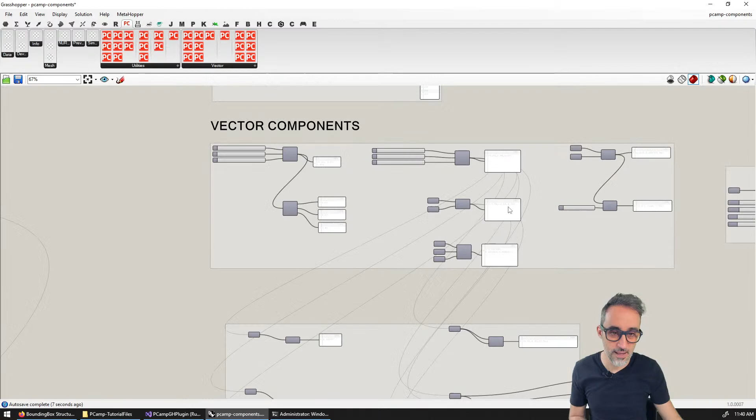So what I would like to do is invite you to practice by taking all the components that we had prototyped as we were developing this video in C# scripting, and I'd like you to do the exercise of porting or rewriting those into native components that look something like this, where you can't double click on the elements, and where you'll probably design proper icons for each one.

So in the native plugin we've been developing, I spent a live stream rewriting all these components, the simple ones, the utility and the vector ones, into native components. And you can see I was super lazy, so I just used the same icon over and over again for all of them. Hopefully you're a better designer than I am and take the extra work of designing nice components for this.

But I haven't done the rest of the more interesting components, the NURBS components, the data ones, dynamic simulation components, mesh, etc. So I'd like to invite you, if you're interested in practicing and learning more, to take the source code and the project I've been developing during this video, and extend it to include and mimic all these components that we have here.

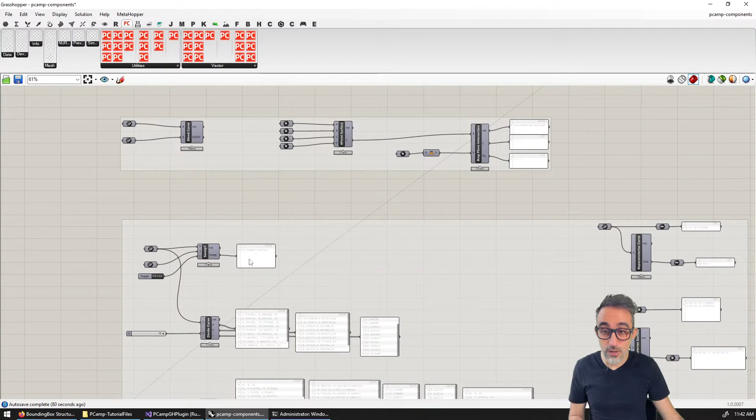What will be interesting about this exercise is that most of the source code you can already see from the C# prototypes, although some minor tweaks might need to be done. You'll have to handle the inputs and outputs, define for each component what types you want in the manager, for inputs and outputs, etc. You may want to include custom icons, break down the order in which components show up in each category block, and for data-intensive components, do some translation between how data is handled in C# script versus native, which we already discussed in a previous video.

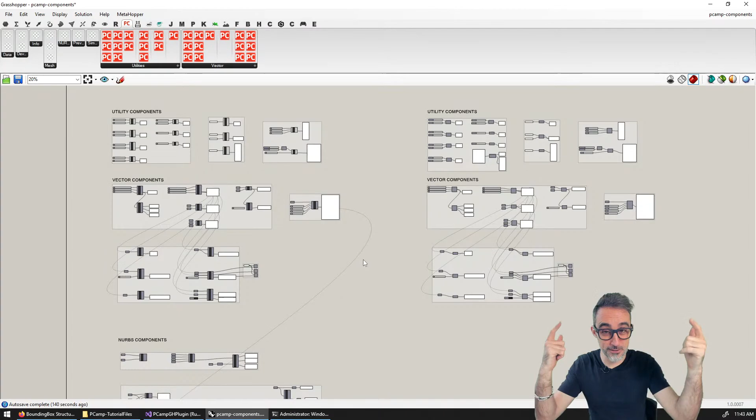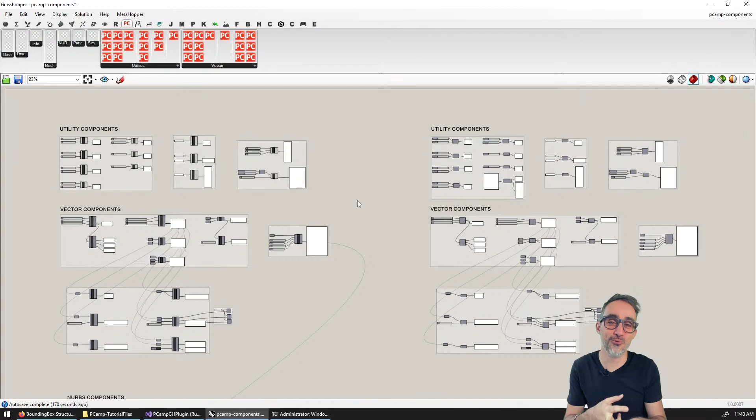So I'm not going to show you how I did this - it's long and boring, and I actually spent most of the live stream fixing a bug I couldn't track down for development with this file. If you're interested in seeing how I very quickly copy-pasted and implemented all these components, there will be a link to the live stream popping up as a card, and perhaps a link in the description, if you want to see me struggle through that bug and copy and paste things from the C# scripts to native components.

I think this will be a really good exercise. It will help you practice. It will be easy - you can just grab coffee while doing this because it's fairly mechanical, but it will teach you the nitty-gritties of how to design components natively, so that when you develop your own component and your own plugin, you have that muscle memory already built into yourself.

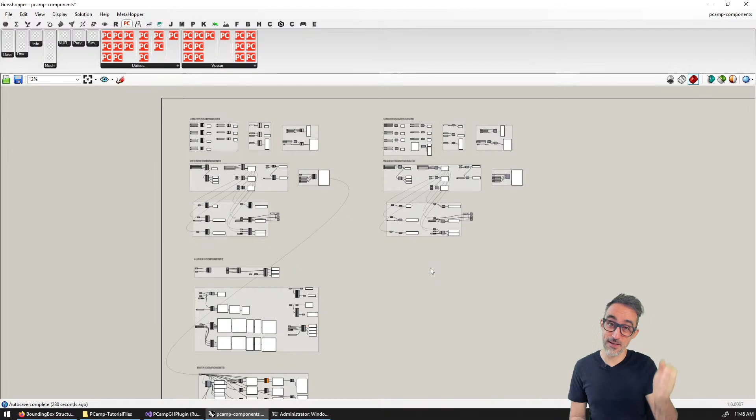All right, and now I'm going to take a screenshot. I'm going to do this for the thumbnail of this video. Can I do this? Yes. All right, that was just a screenshot I'll take for the cover image of this video.

Okay, that was a lot. So what am I going to do next? I'm going to save this. Close this. Probably I have to resave this. Yes. Git commit, save file. Okay, and I'm going to push this. All right, and I'm going to close here.

The next video on this playlist will be that video - remember this one? Where I jumped in and said 'Hello, this is Jose Luis again.' Remember this video when I interviewed Andrew, Raja, Andy, and Mike, and we had a conversation about designing plugins? That was a lot of fun, that was great actually.